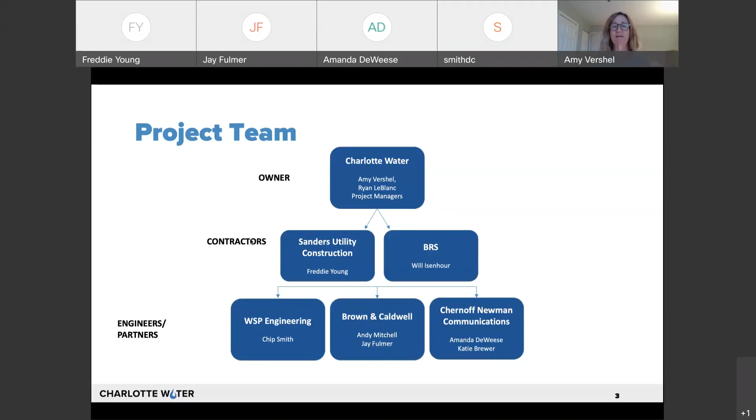We have 2 engineers that are working on this project. Initially, Brown and Caldwell did preliminary design, and they have stayed on as advisors. Andy Mitchell and Jay Fulmer are leading those efforts. With WSP Engineering, they are doing the detailed design, and you will be hearing from Chip Smith in just a minute. And you've already met Amanda and Katie Brewer, who are also both with Chernoff Newman Communications. They'll be helping us with newsletters and so on.

So why are we doing this project? This water main project will serve the eastern part of Mecklenburg County, just keeping up with growth with aging infrastructure. We want to make sure that we can serve our water customers without missing a beat. So if one part goes out, there's redundancy. We have another water main that will be able to pick up the slack. So as maintain the quality and reliability of service, and meet the current and future needs.

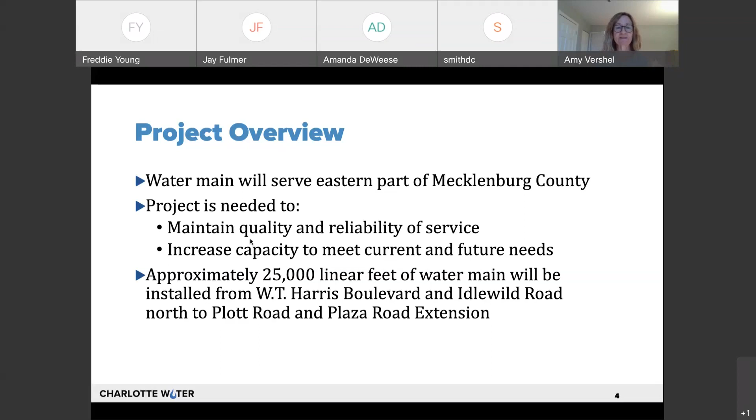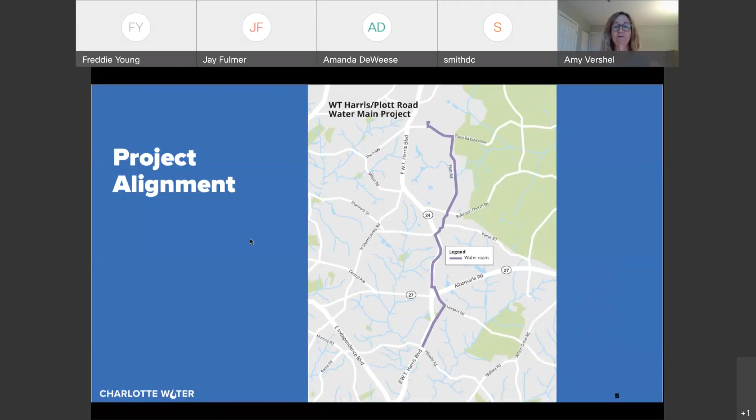This water main is nearly 5 miles long, 25,000 feet, going from the intersection down there at W.T. Harris and Idlewild Road, running along various roads, ending up on Plott Road, and finally up on the plaza. And with that, I will turn it over to Chip Smith.

Thank you, Amy. So project progress to date, we've been working on this project for approximately 12 months. What we've been doing so far is land surveying and underground utility markings. You probably have seen some of their sub-consultant crews doing this work out in the field. They've been diligently working on collecting this information. We've also done some geotechnical investigations, which are used to determine what type of soil conditions there are where the pipe will be installed and locate any rock that may be encountered.

We're currently working on the design of the new water main, actually doing the construction plans. The plans are approximately 90% complete now, so we're very far down the road in completing the design of this project. We've also done erosion control plans, and we've gotten approval from the state who handles this for them, and that we have a permit already in hand for erosion control.

We're also in the process of developing traffic control plans. We'll be coordinating with Charlotte's Department of Transportation and NCDOT on these plans, and they are nearing completion. And finally, easement acquisitions. We have started that process or been working on that for probably 6 months. Many of you may have heard from our real estate coordinator, Telex. They're handling the actual contacts of the individual property owners who easements are required from. Next slide.

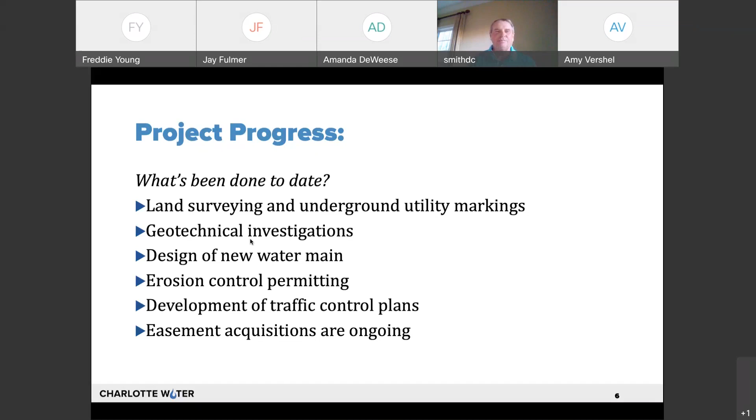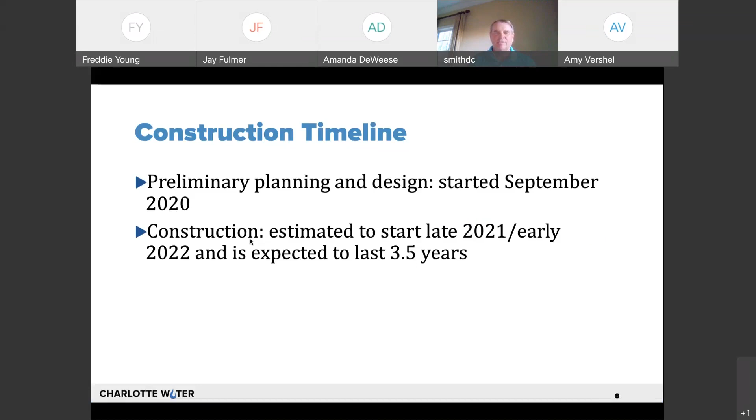So just to give you an overview of construction. As I said, we started in September of 2020. Construction is expected to start in late 2021 or early 2022 and is expected to last 3.5 years. That's mainly because it's nearly 5 miles long.

Some of the overview of the water main construction activities: clearing and trimming within the easements of trees and shrubberies that need to be moved out of the way, moving construction equipment onto the site where the pipeline will be installed, and pipe delivery and storage. You'll see 36-inch diameter pipes strung out along the construction corridor at different parts of the construction. Also part of that is establishing a safe work zone to keep private citizens and pedestrians out of the work area.

It's an unsafe location and nobody should go in there except the contractor and authorized personnel. Also, traffic control—in some areas there'll be a need for lane closures and/or temporary detours to work around the work zone where the road can't be maintained. Trench digging, placing pipe, and backfilling: the pipe is put approximately 6 feet in the ground, so it requires a significant trench. Then the pipe is placed and put together, and it is backfilled back to the original grade of the ground. Part of that may need some rock blasting.

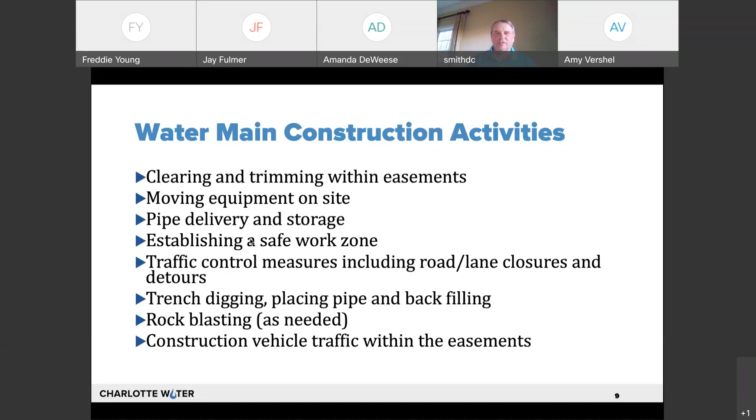The Charlotte region has shallow rock in a lot of different places, and it may be possible that there will be some rock blasting. Freddie Young with Sanders Utility is going to expand on that in a moment. Then there'll be construction vehicle traffic within the easements—excavators, dump trucks, any type of equipment used to do the trench digging, placing the pipe, and backfilling.

As with any construction, there's a potential for water service interruptions, especially when a new water main is being installed, and a temporary shutdown may have to occur on the existing water line. If there are any, they will be communicated to affected customers 72 hours in advance. Unplanned water outages are considered emergencies and will be repaired as soon as possible. If you experience cloudy or discolored water, please run cold water for up to 15 minutes—this helps clean the water that gets dirty with a water shutdown. If it doesn't clear, call 311 and say 'water emergency' for assistance.

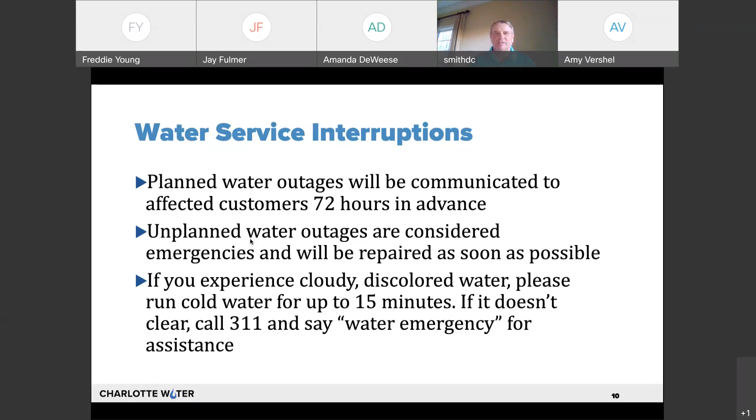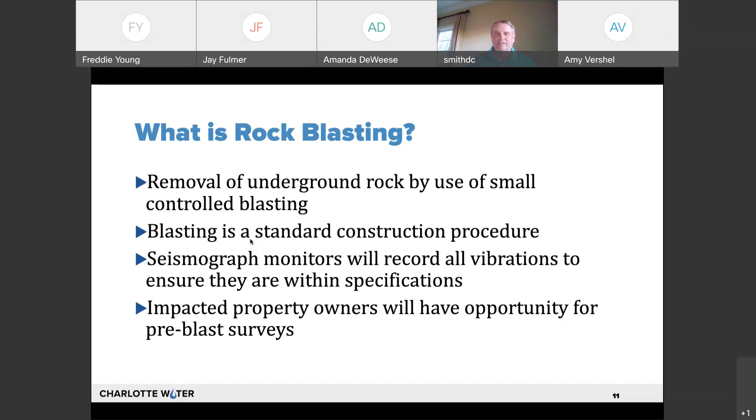So I'm going to turn it over to Freddie Young, who's going to give us a little more detail on what rock blasting will look like. Thanks, Chip. Along this route we do expect some rock in areas, and prior to us getting there to do the actual rock excavation or blasting, any property owners within a 500-foot zone or 1,000-foot zone will be notified a couple of months in advance. You will probably have a company called Vibra-Tech, and maybe another company that Charlotte Water also uses, contacting you to do pre-blast surveys of any property that would be affected in that area. We do this to protect you as a property owner, and ourselves, by documenting the existing conditions of the structures before we begin.

Hey Freddie, is there a way you can get closer to your mic? It's a bit hard to hear. Okay, can you hear me now?

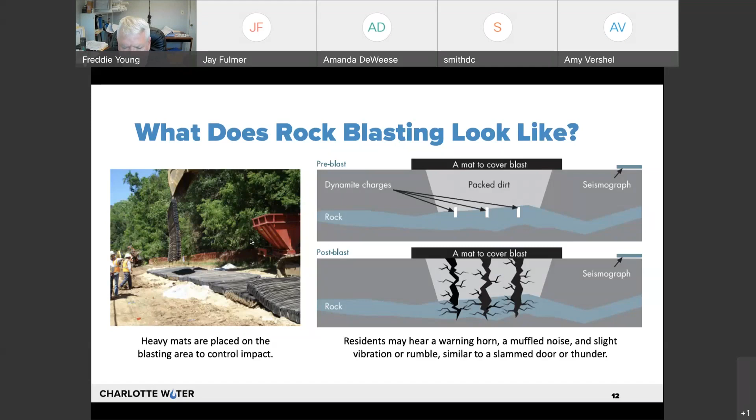You'll hear a warning tone before. We will have signs up and communicate when we're going to blast, using air horns to warn an hour before, 30 minutes before, and then right before the blast. And we will contact you.

During mobilization, when we start to move to the site to begin construction, you will see large equipment come out onto the site. You will see erosion control methods such as silt fence go in to protect against soil runoff, keeping it from getting into streams or lakes. This is large construction with 36-inch pipe, so you'll see large excavators, large loaders, and once we start work, you'll experience some construction traffic from dump trucks or pipe deliveries along the side.

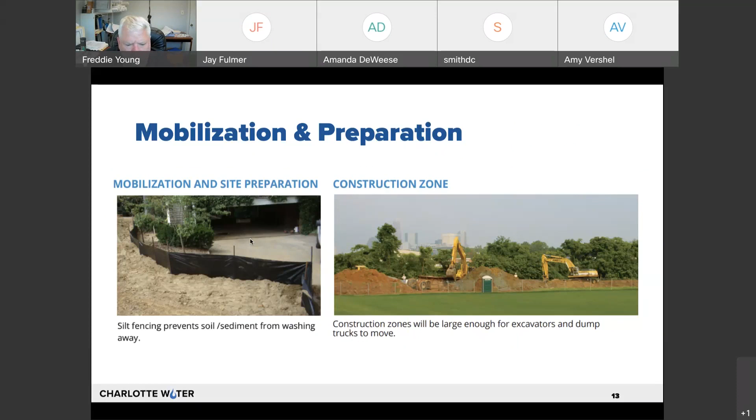During active construction, we won't be doing the whole 5 miles at one time. We'll be working specific areas, progressing along the 5-mile route. You'll see open trenches with shoring, fencing, and barrels. You'll see traffic control, crews digging with excavators and loading dump trucks, and loaders moving pipe and stone. This is big construction.

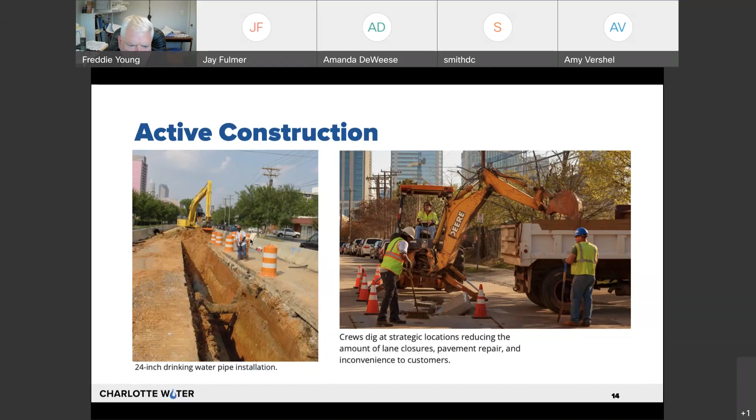You'll be notified in advance as we get to an area. In some cases, if we're working on a narrow street, we may have to repave the whole street once we lay the pipe through it.

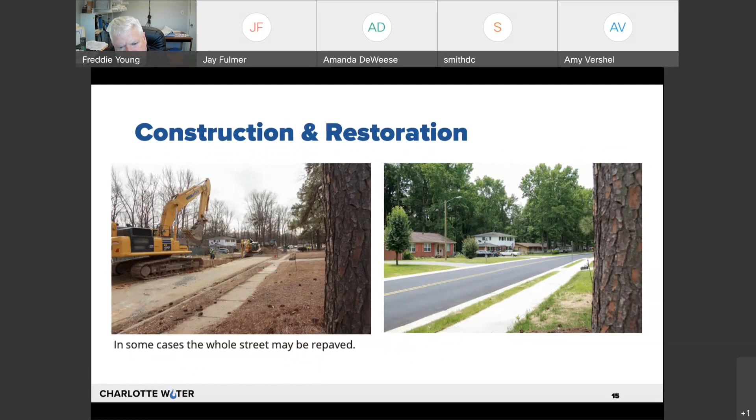When we are through, we will restore everything to as it was or better. You'll see areas seeded in straw with grass seed, new pavement and patches, and new curb, gutter, and sidewalk in certain areas if we disturb those things. It's an ongoing process.

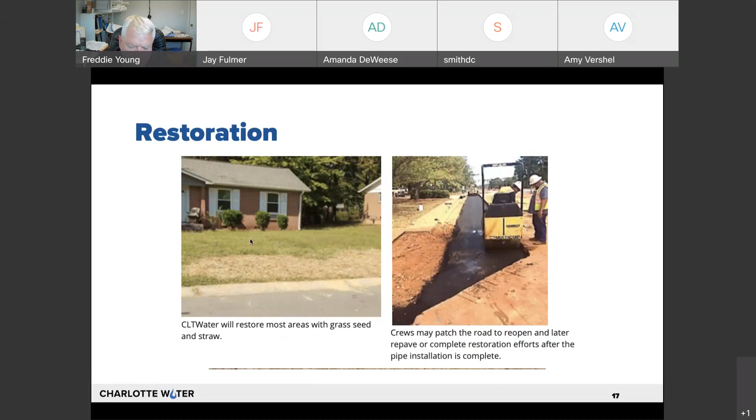As grass starts to grow, we may have to come back and seed it a couple more times to get it to fully come in. The straw on the ground is there because if you're a property owner with your yard or the easement area reseeded, you should not cut this grass until it's fully established. Don't kill it, because when it's young it's very susceptible to dying if cut too close to the ground.

The next steps are final easement acquisition and mobilization of the construction equipment. Construction is expected to start in late this year, 2021, or early 2022.